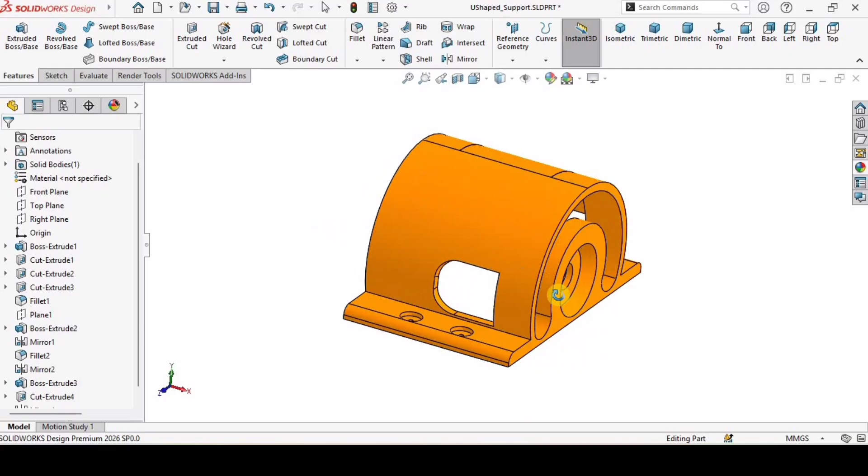Let's begin. Open a new part file, and I will uncheck this reflection. This is an optional step, but make sure you are working in MMGS units.

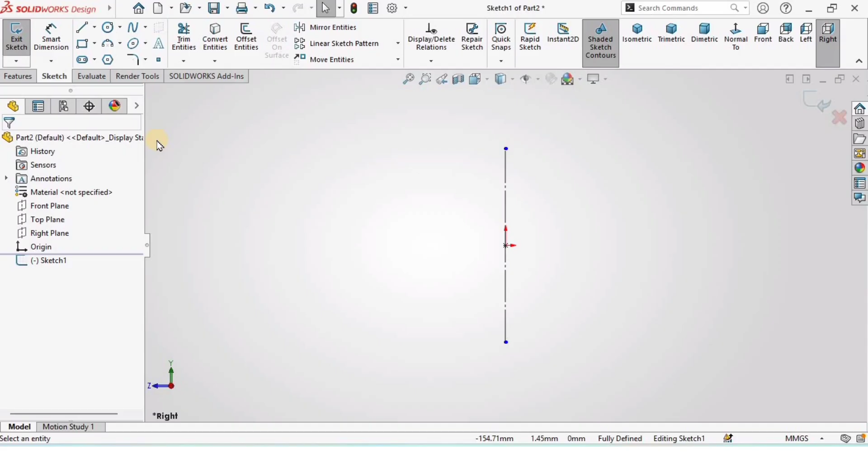Now I will click on the right plane and select the sketch. After that, I will create a reference line, which is going to be a midpoint line. I will select this line and assign a vertical relation, then select it again and make it construction geometry, which turns it into a center line. Now I will use the smart dimensioning tool and specify the dimension of this line as 22.3 from the midpoint.

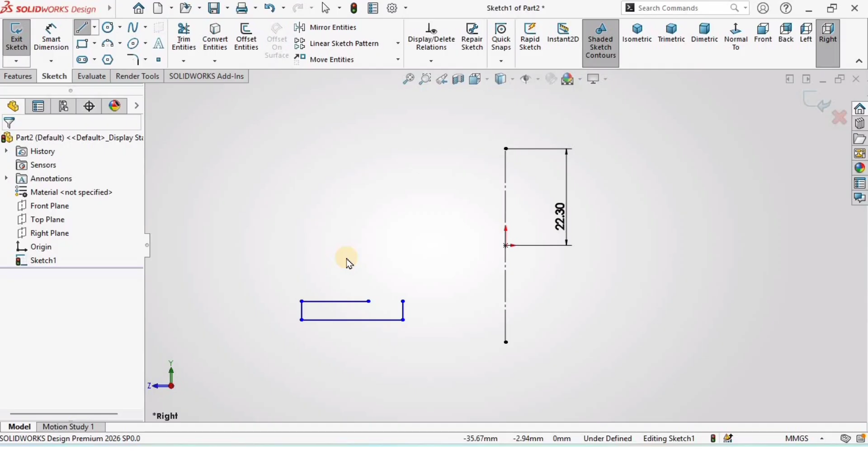Then I will select the line and create a sketch in this area. After that, using the smart dimensioning tool, from the center point to this line I will specify the vertical distance as 10 millimeters.

Then I will specify the length of this vertical small line as 3 millimeters. This is the same, 3 millimeters. Then the length of this smaller line is 10 millimeters, and the length of this bottom bigger line is 12.12 millimeters.

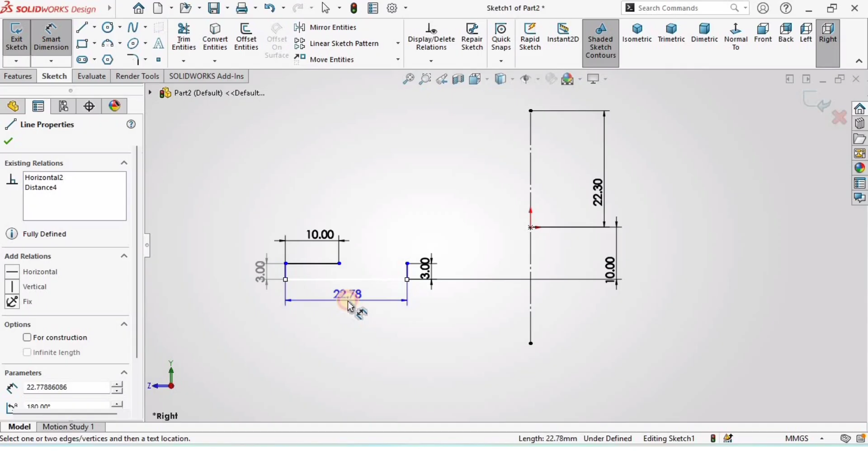Now this is fully defined. Then I will select the 3-point arc from this point to the top point of the midpoint line. I will create an arc, and another one like this.

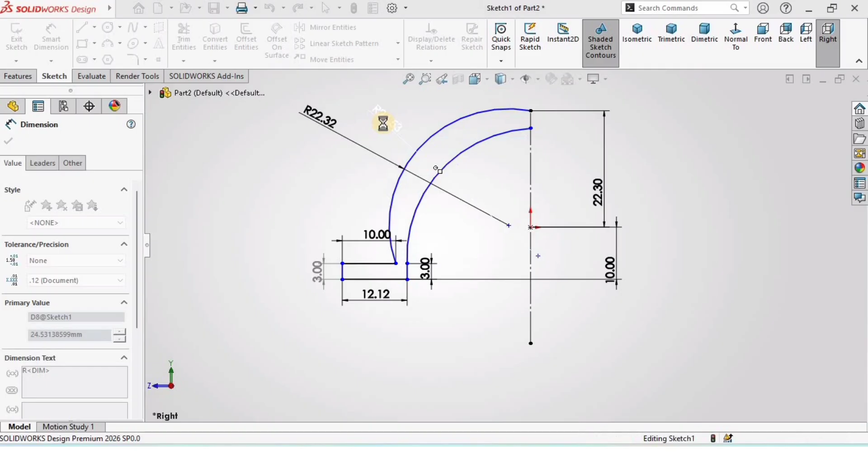After that, I will use the smart dimensioning tool and specify the radius of both arcs. The bigger arc radius is 22.32 and the smaller one is 20.32. Then I will specify the distance between these two points of the arcs as 2 millimeters, and from this vertical line to this center line I will specify the distance as 31.2 millimeters.

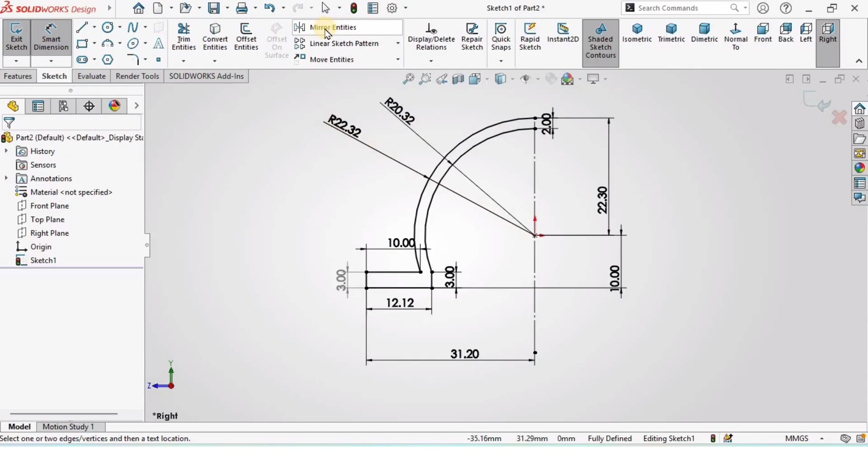Now this is fully defined, as you can see from here as well. Now I will select mirror entities, and in this window I will select the entire sketch and mirror it about this center line so the whole sketch mirrors like this. Now, as you can see, the sketch has turned blue.

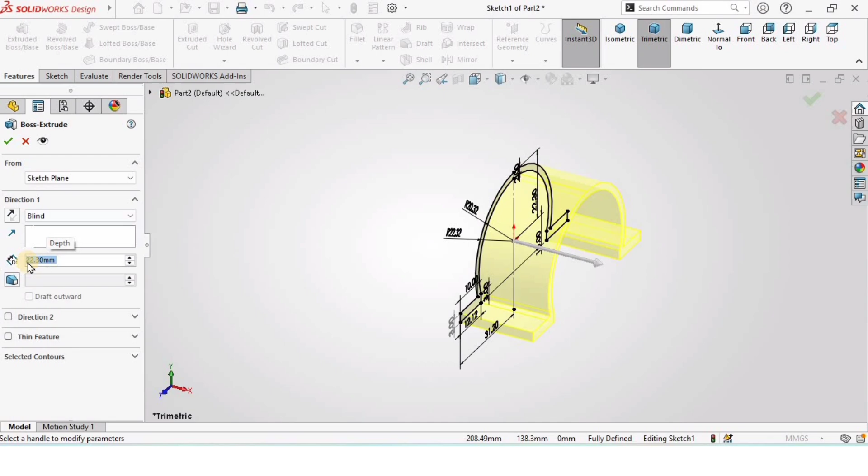I will go to features, select extruded boss base, and extrude it up to 22.3 millimeters, then check the box. Now, this is an optional thing if you want to change the appearance of this part—you can assign any color if you want. It's optional, so I'm assigning a solid orange color to this one.

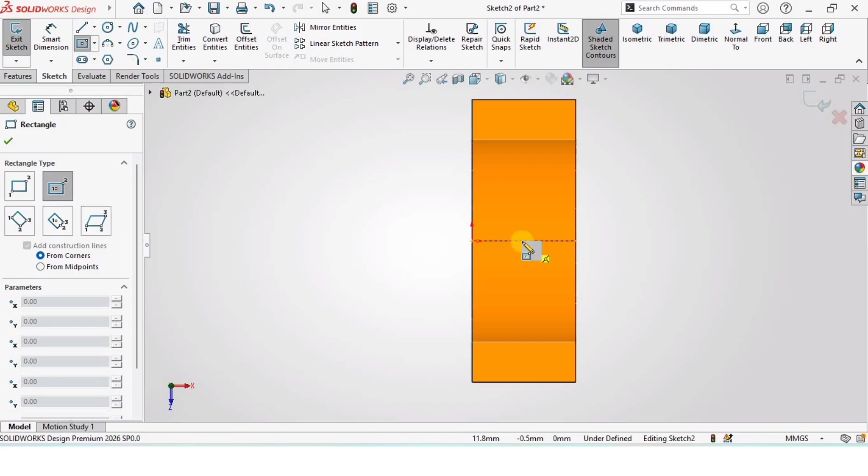Next I will select this face and click on sketch, then create a center rectangle from the center point of this U-shaped support from the top side. I will select the entire sketch, and as you can see, if this is checked for construction, the whole sketch turns into the center line.

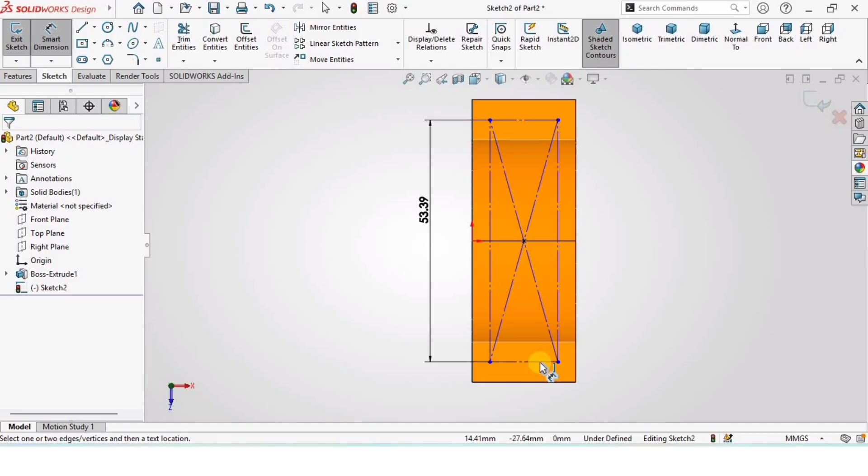Now the length of this line is going to be 53.39, and the length of the other side of the rectangle is going to be 12.3 millimeters. Next, I will create 4 circles on all these endpoints of the rectangle.

After that, I will specify the dimension of only one circle, which is 5 millimeters. Then I will hold the control key, select all of these 4 circles, and assign an equal relation.

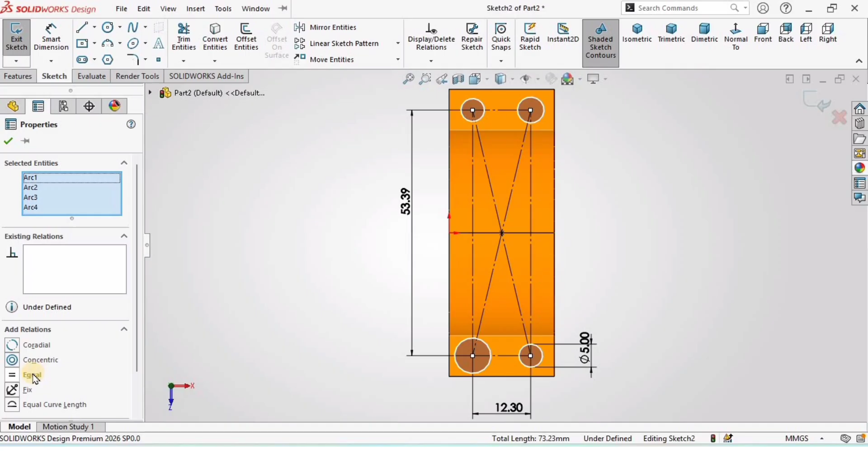Now go to features, select extruded cut this time, and specify the depth of cut as 1 millimeter, as you can see here, then check the box. Now select this face of the cut and click on sketch.

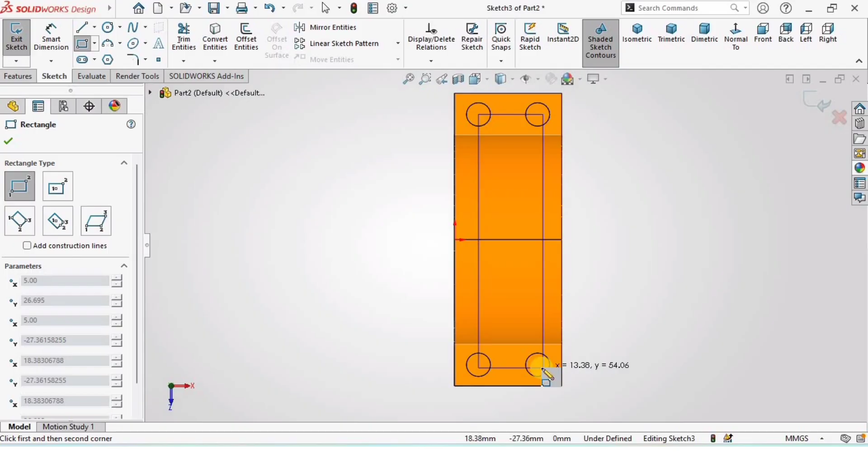Then I will create a corner rectangle from this center point to this center point of the circle. I will again select the whole rectangle and make it construction geometry, which turns the whole rectangle into the center line. Then again I will create the smaller circles in all of these.

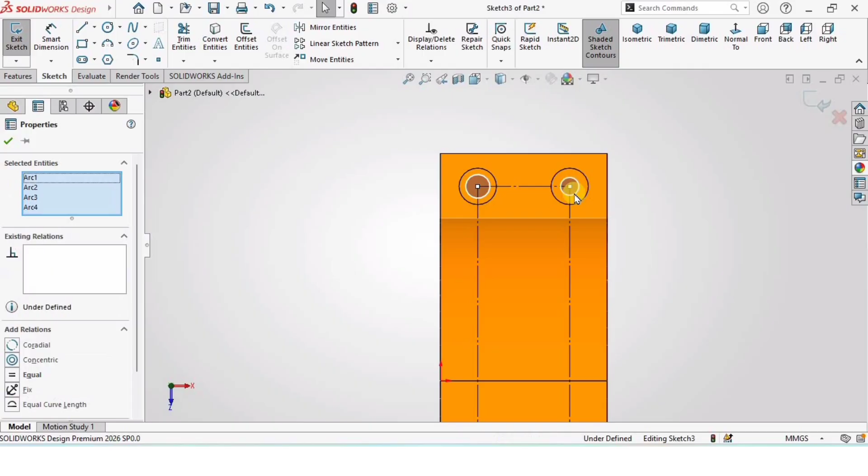I will hold the control key, select all of these four circles I have created, and make sure I have assigned an equal relation. Then I will assign the dimension to only one circle, 1 millimeter, which will be assigned automatically to all the circles because we assigned the equal relation.

Then I will go to features and select extruded cut, specifying through all, and check the box because we want the through-all hole, as you can see here.

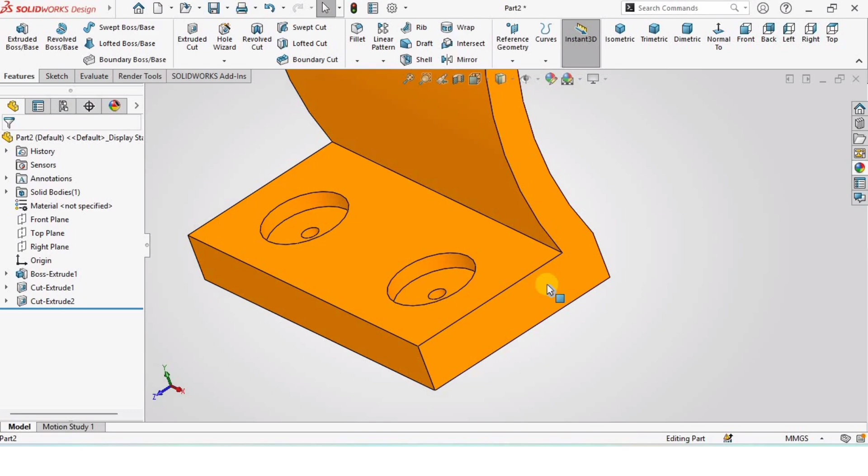Okay, now I will select this face and click on sketch, and select the line. I will create this line at some angle, then a line like this, kind of horizontal, and complete the sketch like this. Select the smart dimensioning tool and select this horizontal distance.

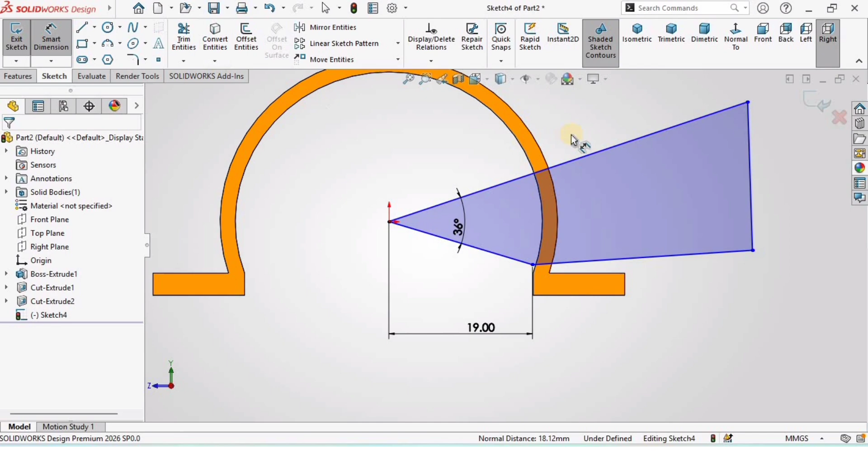This is going to be 19 millimeters. The angle between these two lines is going to be 36 degrees, and the angle between these two lines is going to be 17.63 degrees. Then I will hold the control key, select these two lines, and make a parallel relation.

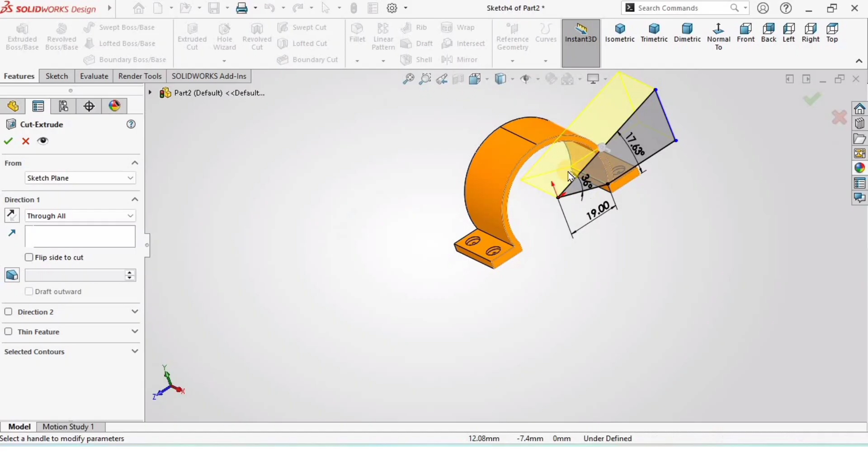Now I will go to features, select extruded cut, and specify the depth of cut. Select blind here, and this is going to be 14.8, then you can check the box.

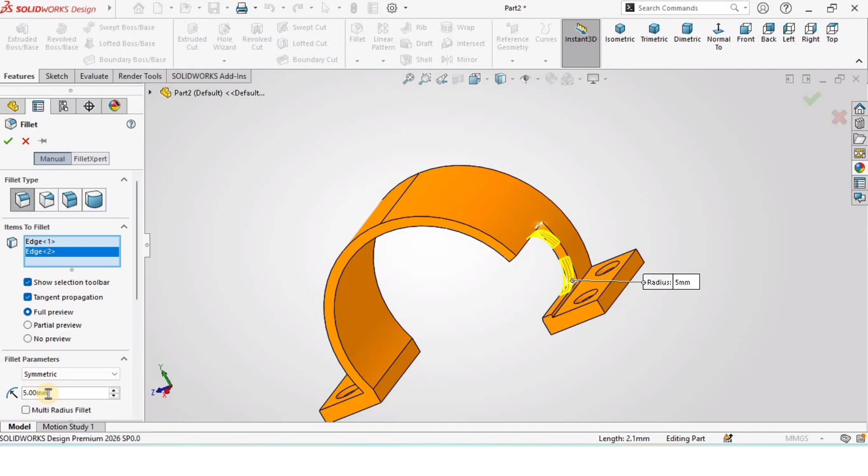Now I will select the fillet, then select this edge and this edge, the inner edge of the cut, and make sure the radius is 5 millimeters, as you can see here. Then check the box. Now I will create a plane from reference geometry.

I will select this face and then select this face. A plane will be created in between these two faces, as you can see here, and then I will check the box.

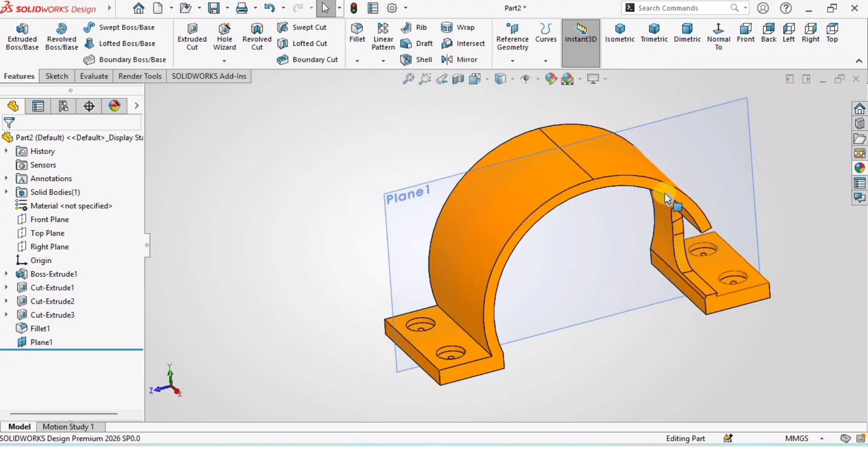Okay, then I will create a sketch on this face. So select this face and click on sketch. Then select this sketch and select convert entities, so it will basically convert all the entities of this one.

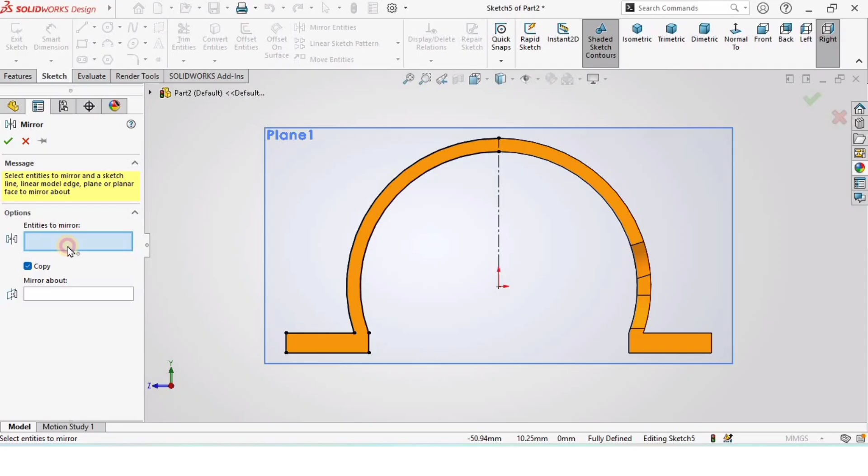Now I will create a reference center line, making sure that this is vertical, and then I will trim this area by using the power trim. Then I will select all of the entities to mirror, and in the mirror about window I will select this center line so the whole sketch can mirror on the other face, and I will check the box.

After that I will go to features and select extruded boss base, and specify the length of this extrusion as 9 millimeters, then check the box.

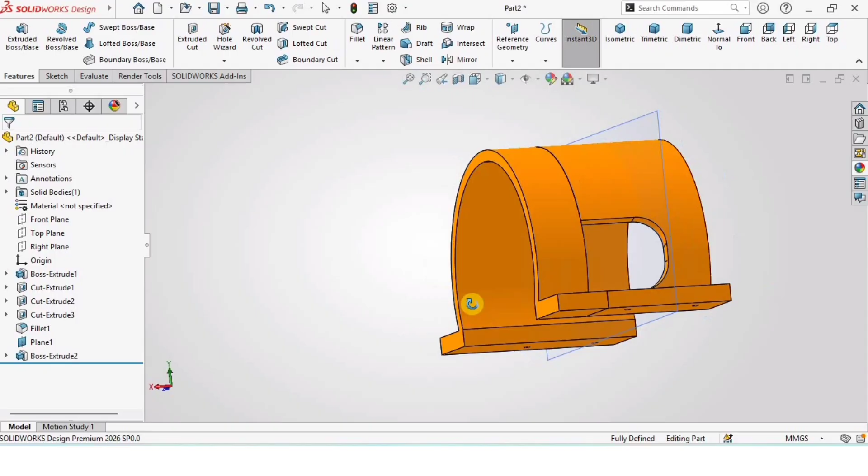Now we want the same dimensions on the other side, same extrusion to the other side, so I will select mirror. In mirror, in this first window I will select this plane, which you can select from here as well, as you can see we have created this plane. Then in features to mirror window I will select this last boss extrude and check the box, and this is mirrored. Now you can hide this plane if you want to, and you can make it reappear from here as well, it's up to you.

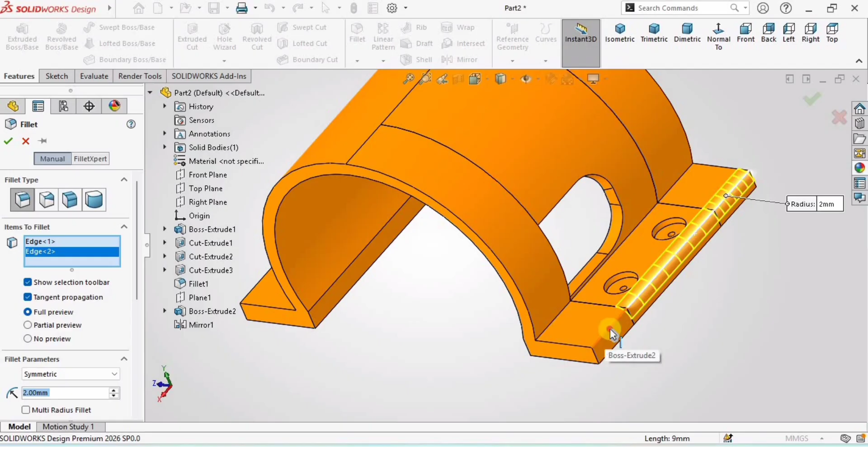Okay, now I will select the fillet, and the radius of the fillet is going to be 2 millimeters. I will select these 3 edges, and this one, and I will check the box. So the fillet has been applied.

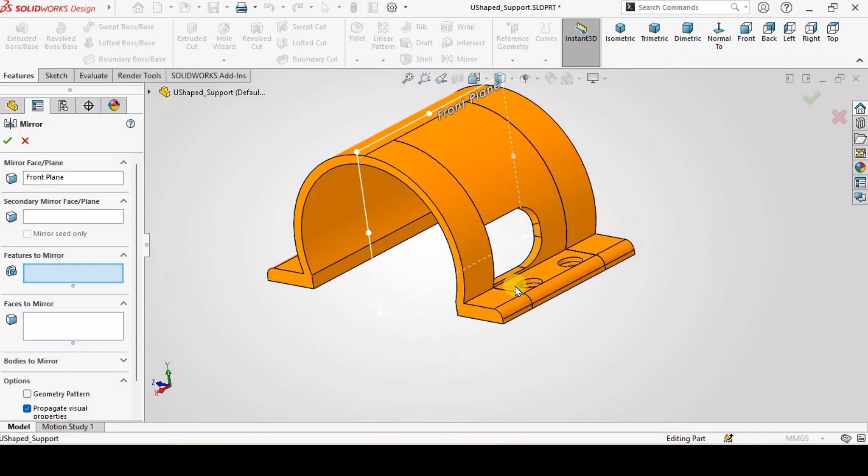Then I will select this front plane. As you can see, this is cutting this part in half; in my case this is the front plane. So I will mirror. In features to mirror I will select this cut, this horizontal edge, so that this cut can appear on the other side, and I will also select the fillet as well. Now the cut has been mirrored to the other side.

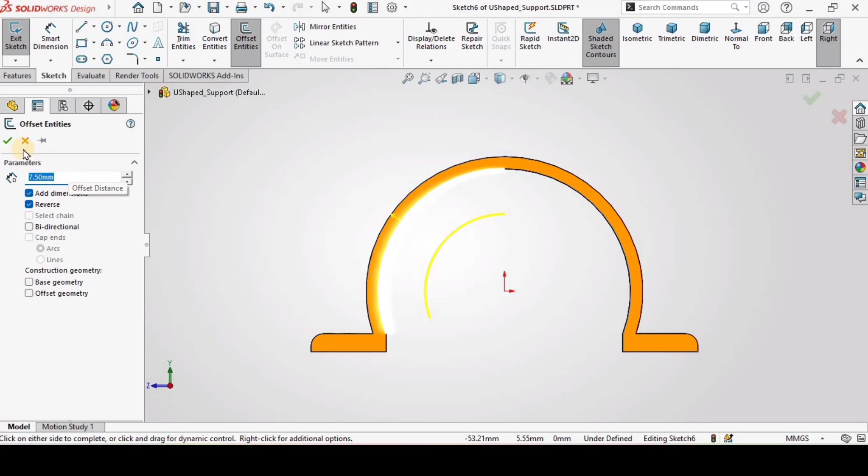Now I will select this face and click on sketch, and I will select the offset entities, select the outer edge, select reverse, and specify 7.5 millimeters for the offset. Okay, now I will create a horizontal line.

Make sure that this is horizontal, so you can assign a horizontal relation to this one. Now the distance between these two lines is going to be 5 millimeters. You can play with this if you want to print this, making some changes in this sketch.

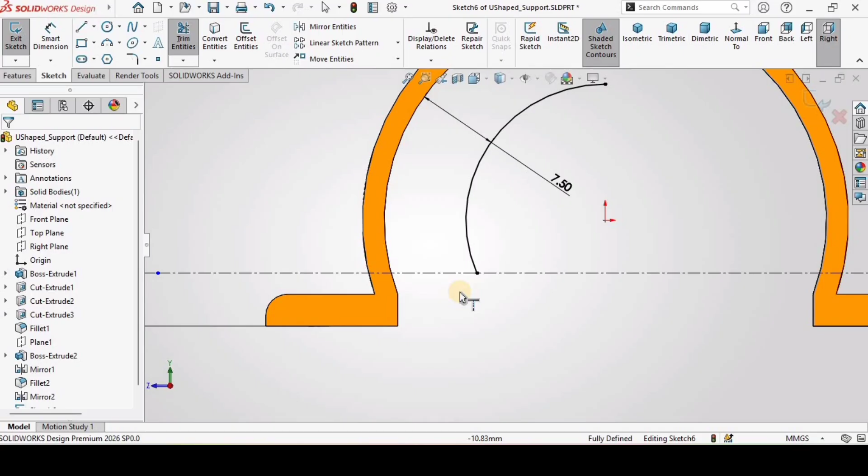Okay, now I will extend it. As you can see from here, this is extended to the center line. Now I will select the 3-point arc and create an arc like this, and after that I will select a center line and create a vertical straight center line.

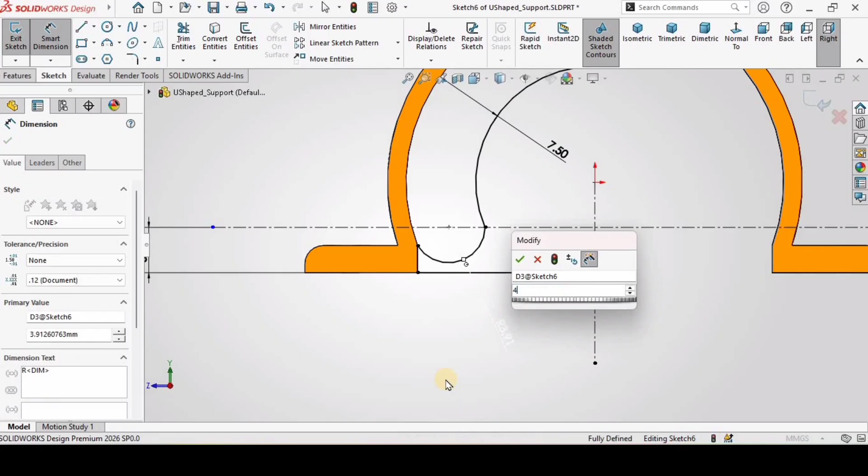Make sure that this is vertical; for that I will assign a vertical relation to this. Now I will select the line and complete this sketch like this, making sure that this is horizontal. Now I will specify the radius of this arc as 4 millimeters - if you want to change this, you can, depending on the strength of this area.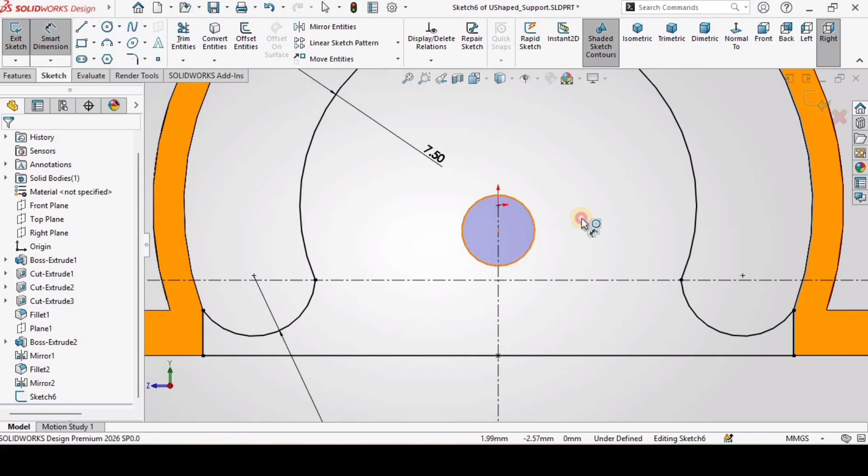Then I will select the mirror entities tool, and mirror about this vertical straight center line, and check the box. Now I will select the circle, and I will not create it at the origin point, a little bit down. I will specify the diameter of this circle as 6.13, and from the center point to the center of this circle I will assign a dimension as well, which is going to be 0.31 millimeters.

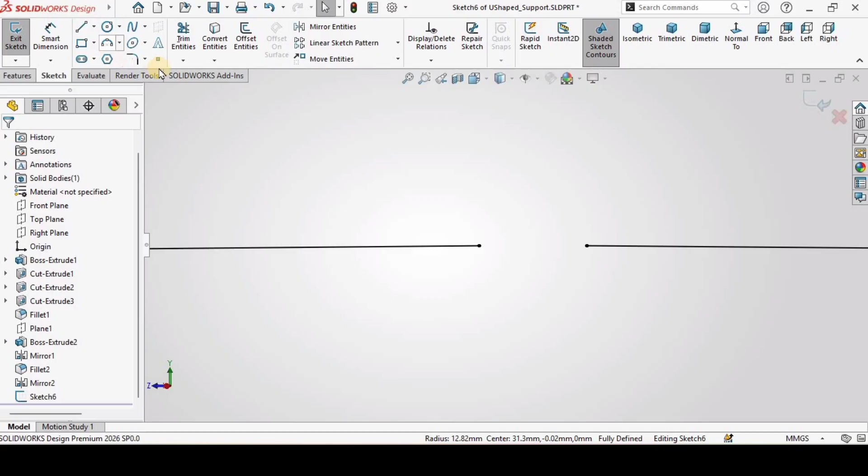If I zoom into this area, as you can see these are not connected. So from here I will select the extend entities tool and select this edge, and as you can see the color of the sketch has turned black, which means the sketch has been completed and we can extrude it.

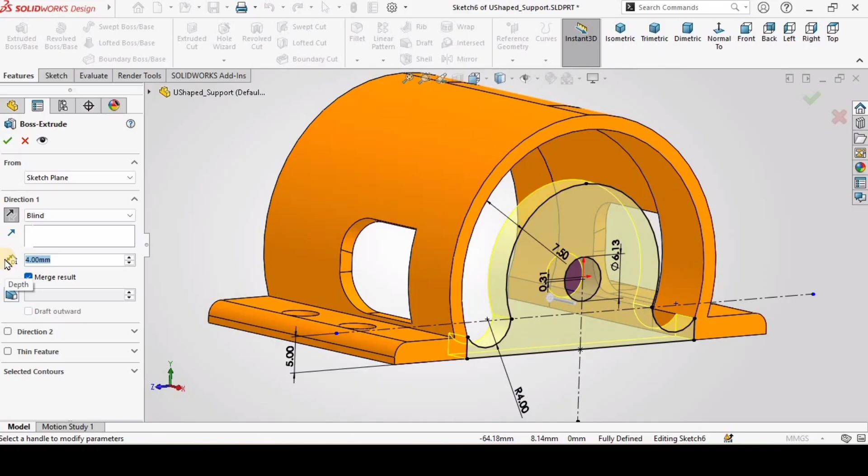So go to feature, select extruded boss base, and specify 4 millimeters thickness of this material, or I think 4.5 would be better. Change the direction of the extrusion to the other side, inward, and 4.5 millimeters the length of extrusion.

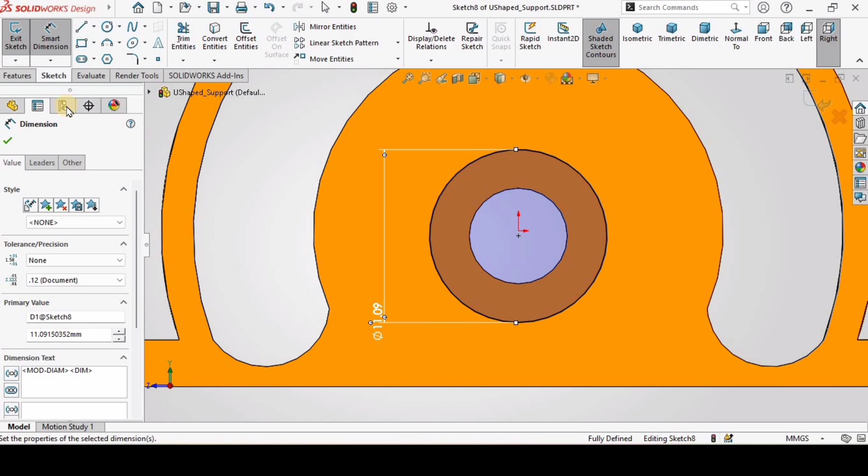Again select this face and click on sketch, and I will create a circle, again not on the origin but a little bit down on the exact center of the previous circle, and this is going to be 17 millimeters.

Go to features and select extruded cut, and here I will specify the depth of cut as 3 millimeters. Also I will enable the draft as well, which is going to be 30 degrees, and then I will check the box. Now I want the same thing on the other side.

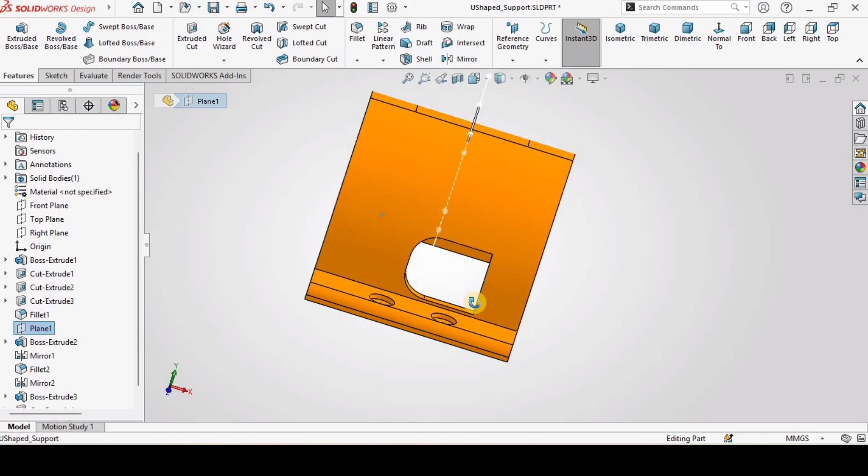So I will mirror this using the plane that we have created, or you can use the front plane if you want to. Keep this plane selected and select the mirror tool, and in features to mirror I will drop down and select the last two, the cut and the boss extrude, then check the box, and this is going to get mirrored on the other side. So this part has been completed.